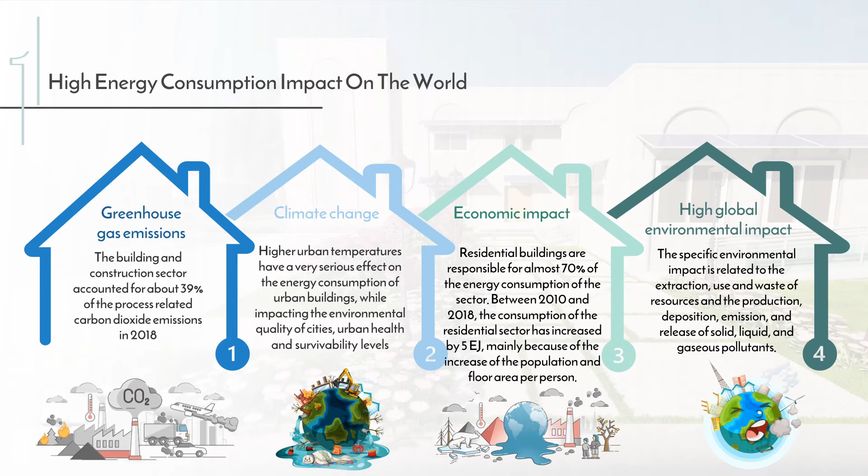High energy consumption impact on the world. First, greenhouse gas emission: the building and construction sector accounted for about 39% of process-related carbon dioxide emissions in 2018. Second, climate change: higher urban temperatures have a very serious effect on the energy consumption of urban buildings. Third, economic impact: residential buildings are responsible for almost 70% of the energy consumption of the sector. Fourth, high global environmental impact: the specific environmental impact is related to the extraction, use, and waste of resources.

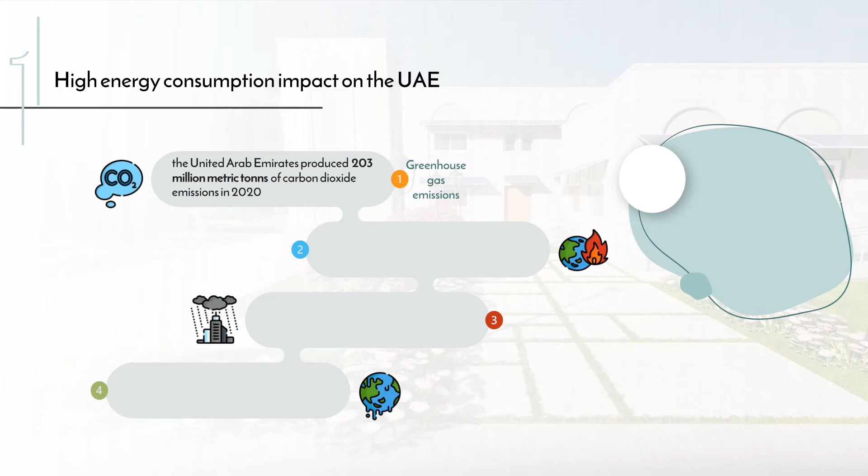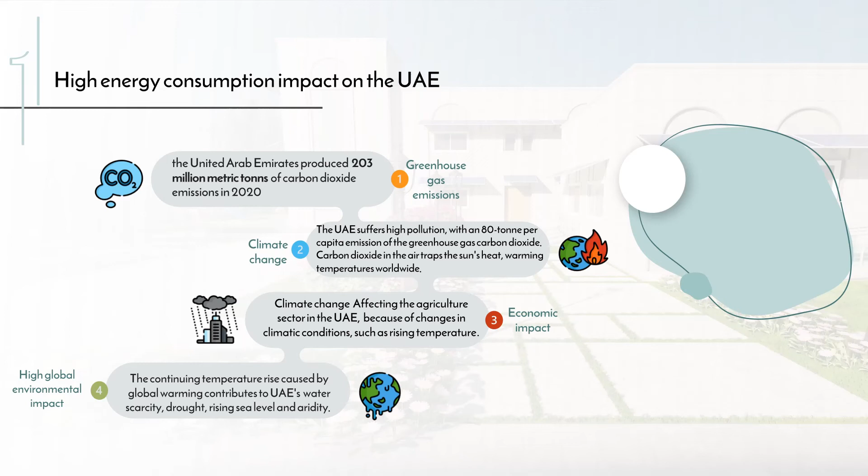High energy consumption impact on the UAE. Greenhouse gas emission: the United Arab Emirates produced 203 million metric tons of carbon dioxide emission in 2020. Climate change: the UAE suffers high pollution with an 80 tons per capita emission of the greenhouse gas carbon dioxide, resulting in high temperatures worldwide. Economic impact: climate change is affecting the agriculture sector in the UAE because of the change in climatic conditions. High global environmental impact: the continuing temperature rise caused by global warming contributes to UAE's water issues.

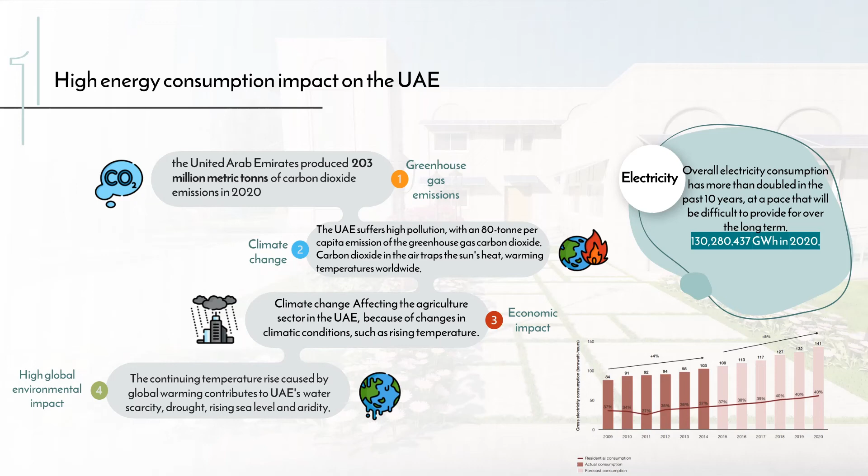The overall electricity consumption reached 130,280,437 gigawatt-hours in 2020. After we measured the energy use intensity of the basic model, we found out that the total yearly consumption of the whole house is 294 kilowatt-hour per meter square per year, which does not achieve the target energy use intensity of 140 kilowatt-hour per meter square per year determined by the Ministry of Energy and Industry UAE benchmark, nor the target of 90 kilowatt-hour per meter square per year defined by the Emirates Green Building Council benchmark.

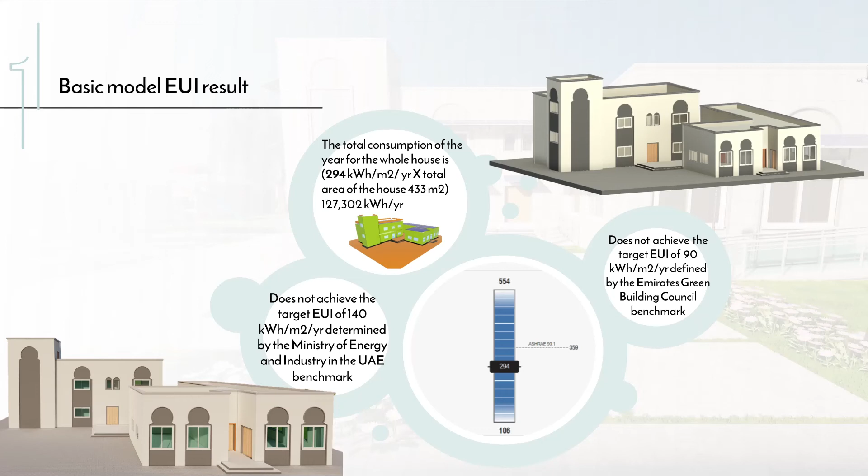Aim of the project: aim and objectives. The aim of the project is to find the best configuration or scenario for the proposed hybrid cladding retrofitting method for the external walls of existing Emirati houses, that would also satisfy the local benchmark of energy use intensity in kilowatt-hour per meter square per year.

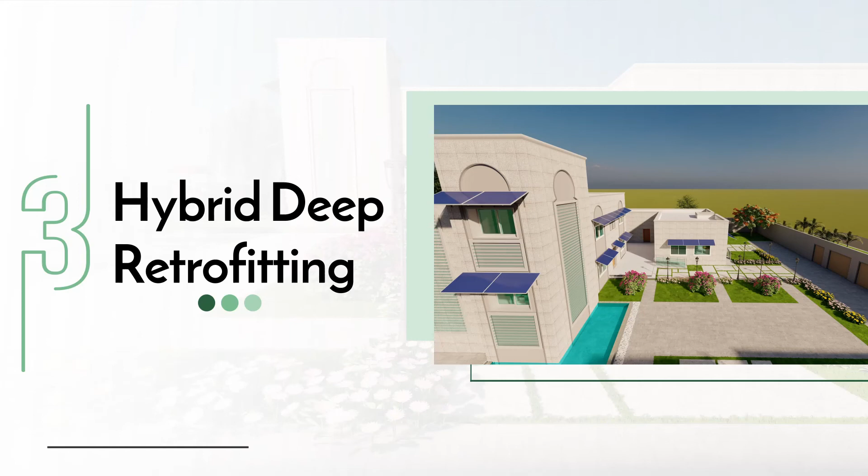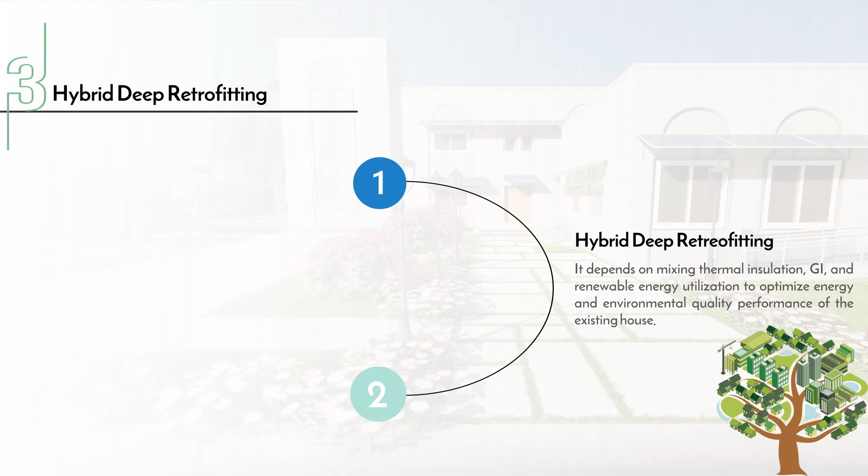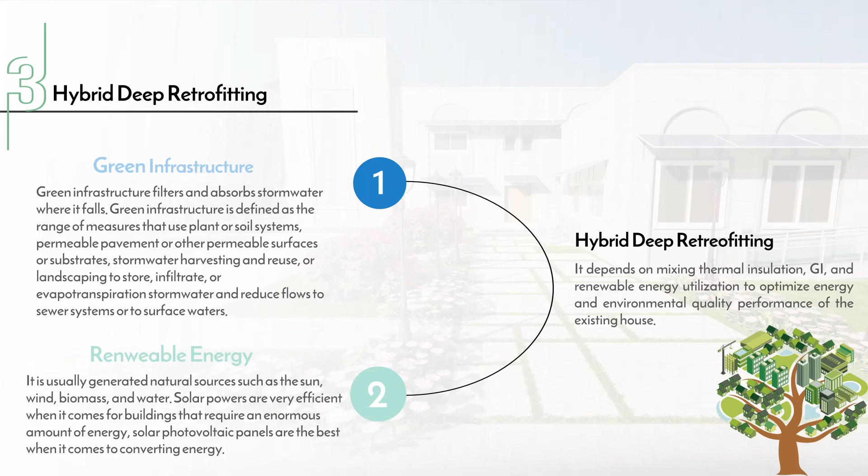Hybrid deep retrofitting. It depends on mixing thermal insulation, green infrastructure, and renewable energy utilization to optimize energy and environmental quality performance of the existing house. Green infrastructure is defined as the range of measures that use plant or soil systems. Renewable energy is usually generated from natural sources such as sun, wind, biomass, and water.

Systems: we propose 3 hybrid deep retrofitting systems. First, thermal insulation cladding systems. Second, green infrastructure living wall cladding systems. Third, building integrated photovoltaic as cladding systems.

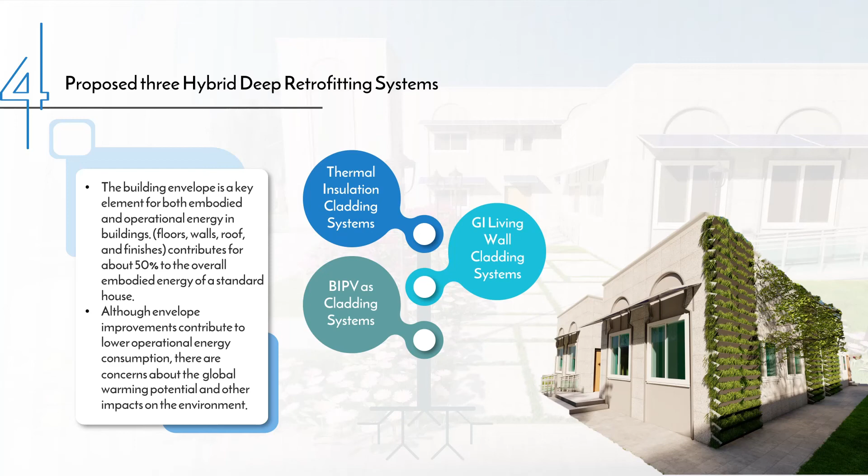Thermal insulation cladding systems: the selected thermal insulation cladding system is KoolTherm K15 by Kingspan. The cladding system fixation method is Starta System, and the window film is Sun Control Window Film Prestige Exterior Series by 3M.

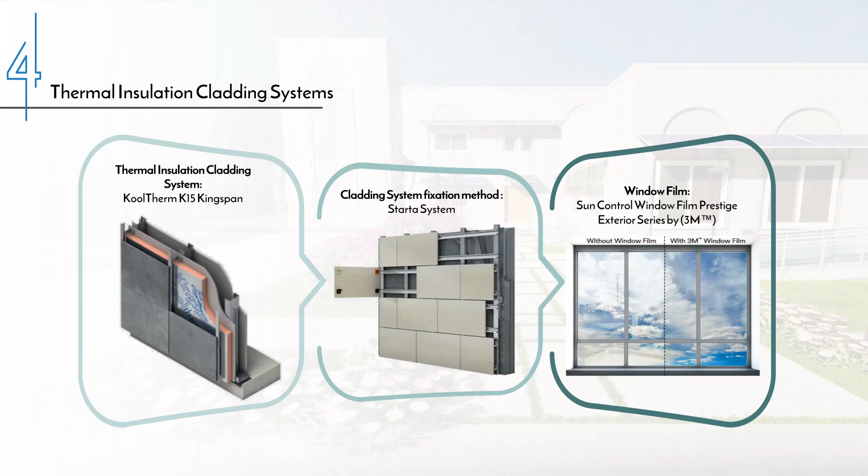Green infrastructure living wall: the green living wall cladding system is by Versa Wall, and the irrigation system is Grey Flow PS plug and play grey water recycling.

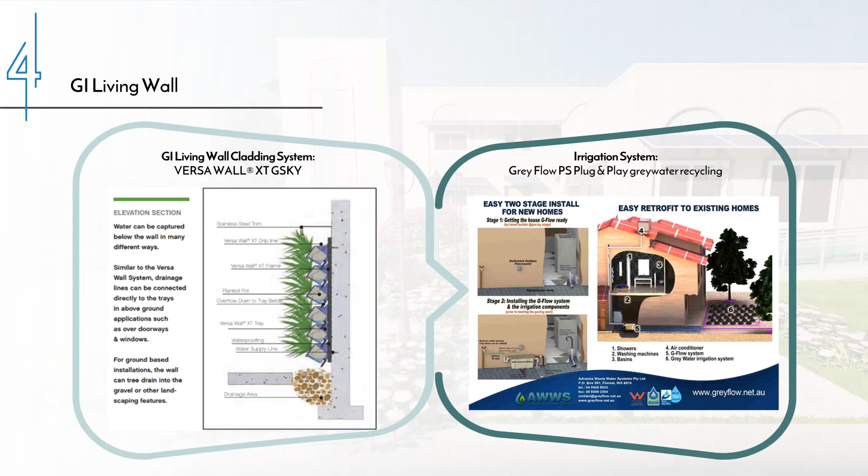Building integrated photovoltaic as a cladding system: the selected PV panel was found to be the SunPower Maxeon, which warrants a 92% power output by the product's 25th year, with up to 22.7% panel efficiency and 430 watt power rating.

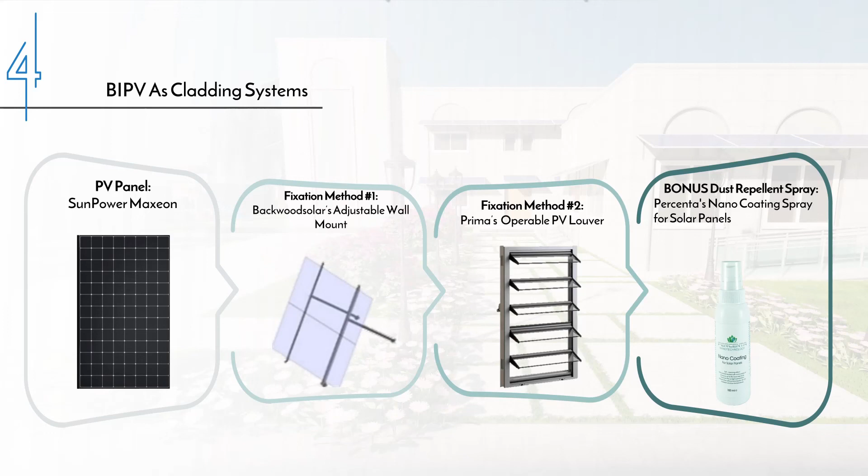For the fixation method, we decided on two approaches: the adjustable wall mount that will be over the windows from Backwood Solar, and the operable PV louvers that will be over the opaque walls by Prima. As a bonus, we researched a dust repellent spray, a nano coating spray for solar panels to prevent soiling. Soiling is a factor known for reducing panel efficiency over the years, so we'd like to prevent that using Percenta's nano coating spray for solar panels.

Finally, we will discuss the scenarios we studied and simulated until we achieved the final goal of this research project. First scenario: this was proposed using the 3D model of the basic house in addition to PV solar panels of the customized BIPV system, covering 100% of north, east, south and west facade areas with limestone cladding and thermal insulation, while in south and west facades PV panels are installed in two different methods, louvered and overhang panels. The PV panels are installed above the windows and the main entrance facing the street and are tilted 66 degrees to match the latitude angle of Al Ain City in the UAE.

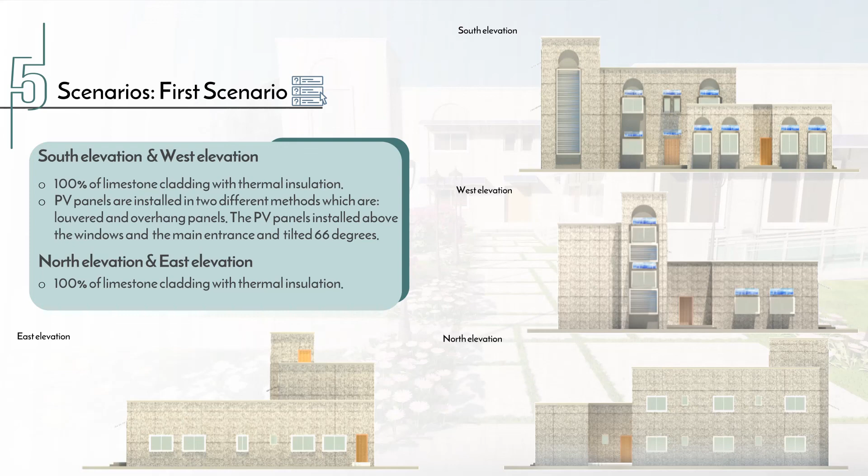After subtracting the electricity output, we end up with a total yearly energy consumption of 231 kWh per meter square per year, which does not achieve the target of 140 kWh per meter square per year benchmark, nor the optimum benchmark of 90 kWh per meter square per year set by the Green Building Council.

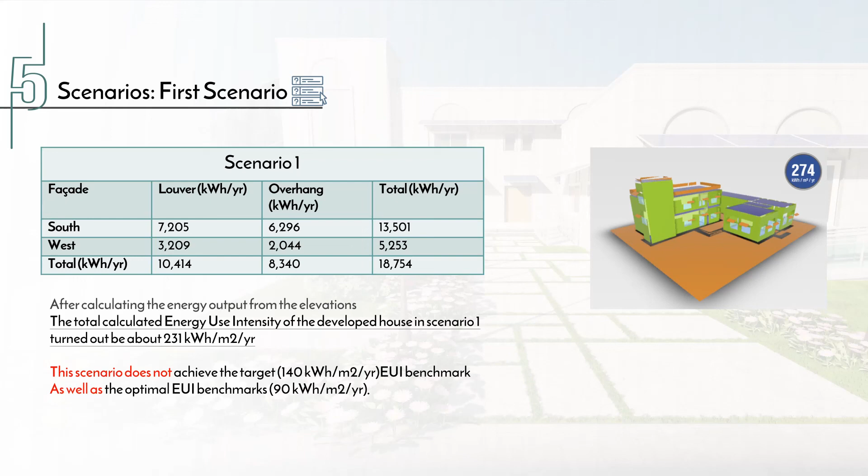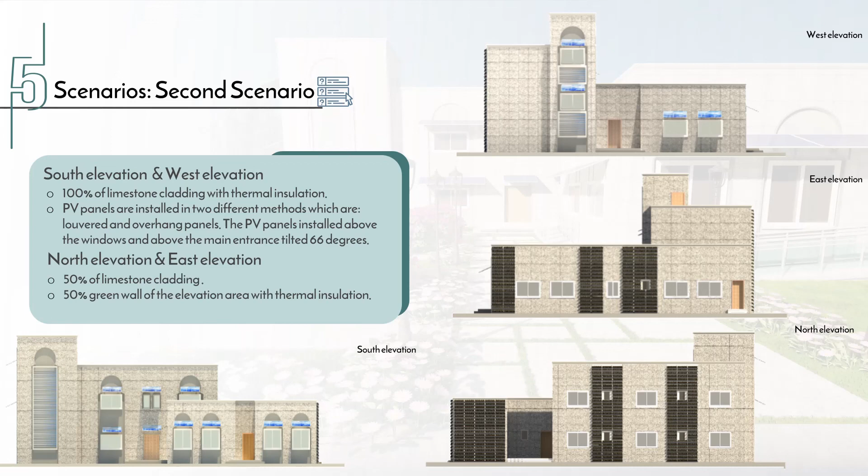Second scenario: we kept the south and west elevations the same, but changed the north and east facades to be 50% covered by limestone cladding and 50% by green wall, designed in BIM as an external layer with a U value of 3.348 watt per meter square per Kelvin degree.

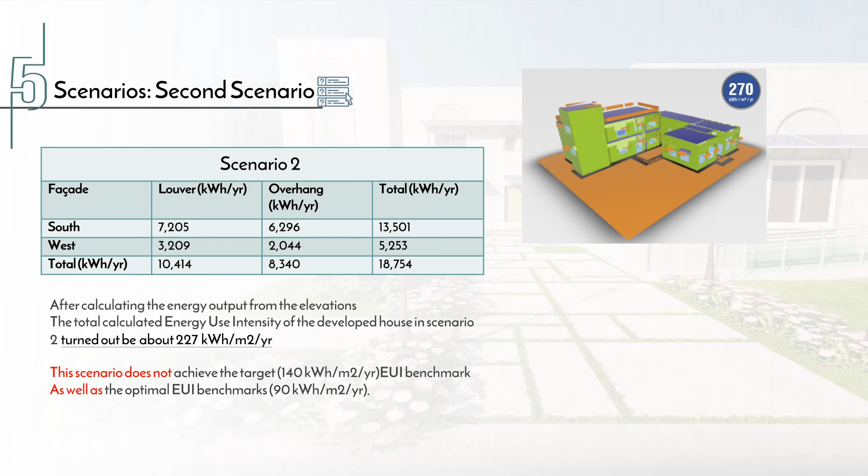After simulation and considering the electricity output from elevations, the total energy use intensity of scenario 2 turned out to be about 227 kWh per meter square per year, which again does not achieve any of our benchmarks.

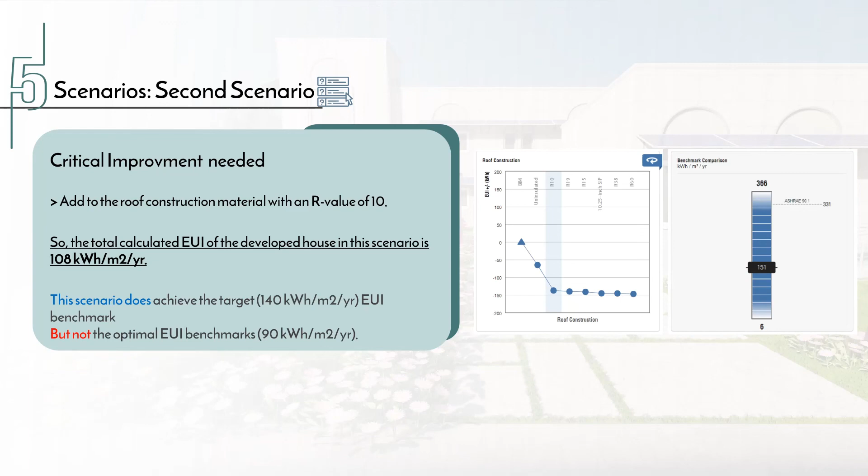In order to achieve the benchmark set by the Ministry of Energy and Industry, we proposed adding a construction material to the roof: XPS rigid foam insulation with dimensions of 5 by 120 by 240 centimeters and an R value of 10. The total calculated energy use intensity in scenario 2 becomes about 108 kWh per meter square per year, but still does not fully achieve the optimum energy use intensity benchmark set by the Emirates Green Building Council.

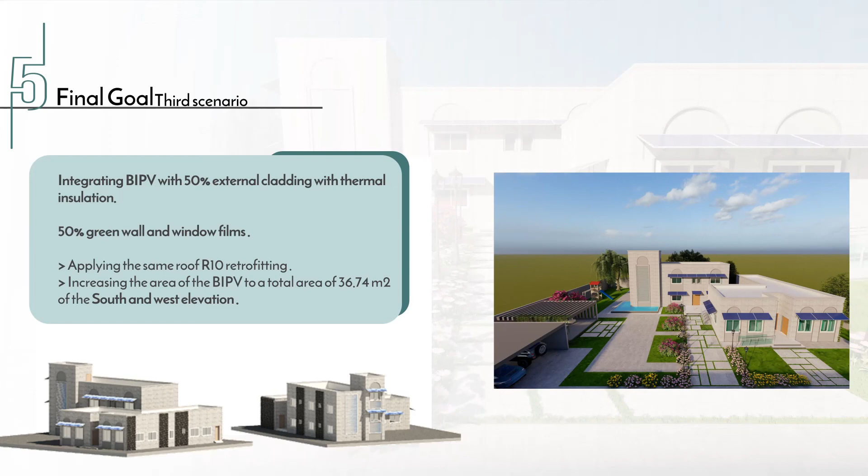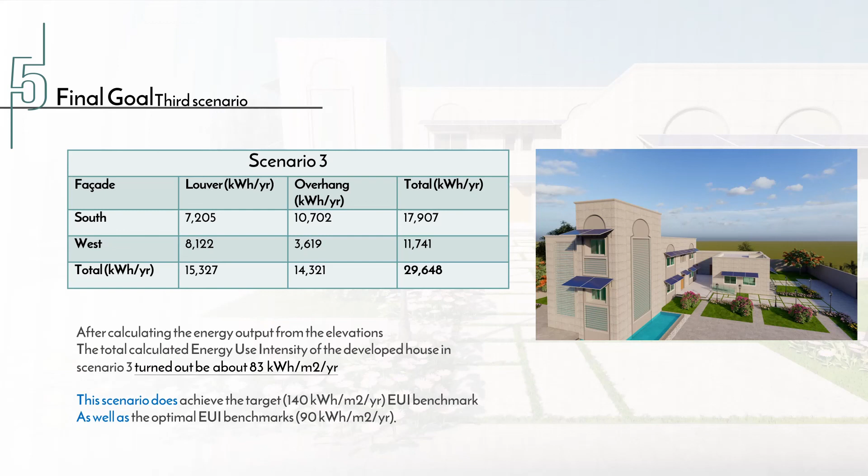In this scenario, we attempt to achieve the target of 90 kWh per meter square per year by applying the same roof retrofitting, but also increasing the area of BIPV. The total calculated energy use intensity of the developed house is about 83 kWh per meter square per year. The result of scenario 3 has achieved the target benchmark determined by the Ministry of Energy and Industry of 140 kWh per meter square per year, and has exceeded the optimal energy use intensity benchmark of 90 kWh per meter square per year.